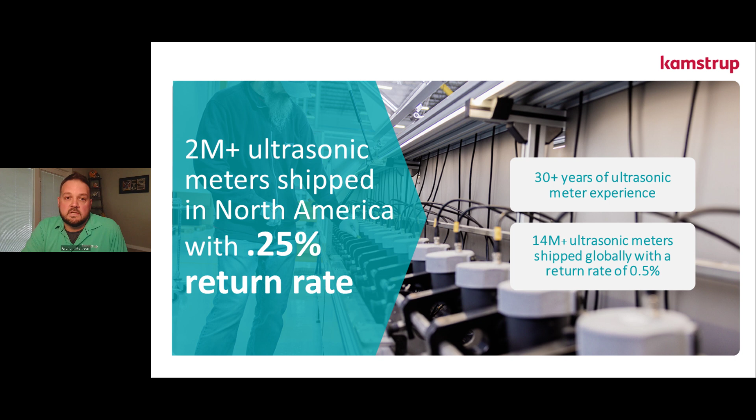The reason we use return rate is because we're counting everything that leaves the factory. If it comes back for any reason other than physical damage or ordering the wrong component, within the 20-year warranty period, it gets counted here. And even at that, we're still at less than 0.25% return rate across the entire spectrum of our product lines.

As I mentioned, all the meters we use here in the US, all the meters we manufacture, are ultrasonic. Let me give you a brief background on how ultrasonic technology works. Essentially, the meters have a couple of sensors in them, 2 ultrasonic sensors. Ultrasonic just means it's sound in a range outside the normal range of human hearing, a frequency higher than you can hear, but it's still sound. We essentially have 2 acoustic sensors passing a signal back and forth. When flow is going through the meter, any signal going with the direction of flow speeds up a little bit, and the signal going against the direction of flow slows down a little bit. We're just measuring that difference in transit time.

So essentially, it's that same equation everyone loved in high school, where one train leaves the station heading one direction, another train leaves heading the other direction. When do they arrive on time? If they don't arrive at their expected times, we're just measuring what time they got there and how much that shift is. That's how we can measure the flow.

The nice thing about that is we don't have to wait for anything internal inside the meter. There are no moving parts. It's a static meter, it's just math. All we're doing is measuring the speed of sound through water, and if it's different than it should be, it's because there's movement. If there's no difference in the speed of sound between the two sensors, it means there is no flow. What that allows us to achieve is, unlike a mechanical meter where starting flow rates are between 1/8 of a gallon and 1/4 of a gallon, with these new ultrasonic meters, we're able to get down to 1/100th of a gallon per minute as far as our flow rates and starting flows.

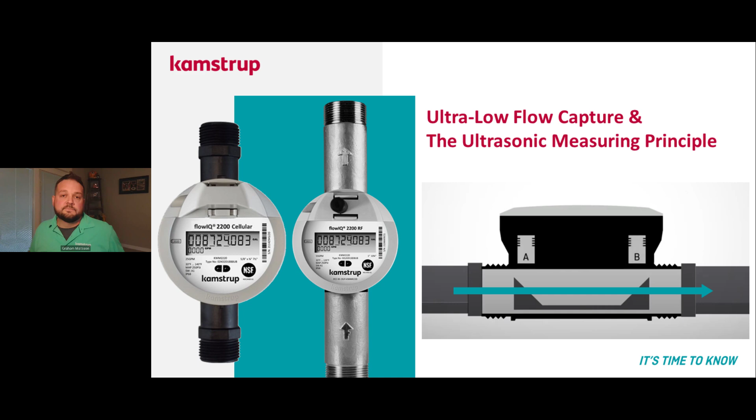When it comes to water loss, first thing we need to talk about is why it matters to your specific utility. So there's a lot of different drivers for water loss. It may be revenue, the big one, that's pretty universal across utilities. Some states have more regulations than others. There may be water scarcity issues in your area, you might be affected by drought. You may just be looking to have a more efficient system, reduce your environmental impacts, and increase customer service.

Big thing here, when we look at all of these, we went out and did a survey of 30 utilities across the US. We asked them what their drivers were, what the different things were that were actually driving their non-revenue water, and what they are looking for in a system to address those challenges and help their customers.

When it came to customer satisfaction, we were surprised at some of the responses we got, because when we talked to the customer service folks or the personnel in the field doing repairs and interacting with customers daily, the biggest question they were getting from customers was, what is the utility doing to conserve water on their side? We've seen rebate programs and other things to help improve customer efficiency and usage beyond the meter, but they want to know what the utility is doing to actually reduce water loss on the utility side. And now we have an answer for that. We'll go through it here in just a little bit.

When we talk about water loss, we need to break down what we're actually referring to. So when we talk about non-revenue water, that's a combination of apparent losses, which would be inaccurate metering or unauthorized consumption, theft, essentially older mechanical meters that lose accuracy over time. That's the water loss we're talking about. It's not actually lost, it has gone through a meter, it's just that the meter did not register, did not capture all of the flow going through it.

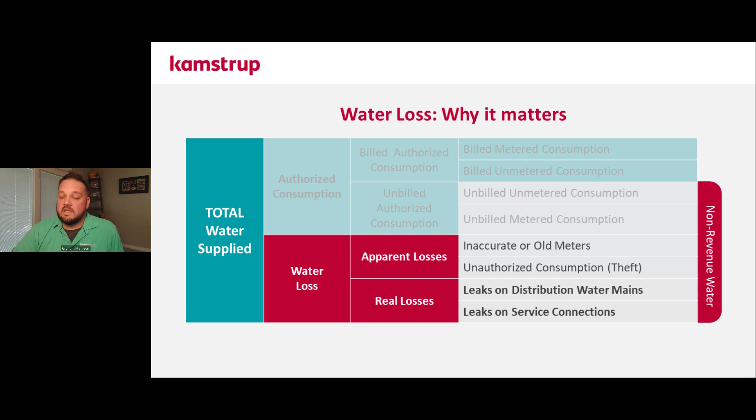When we talk about real losses, what we're talking about is leaks on the distribution main or on the service lines before the meter. So losses where the water is escaping the network before it actually goes past the meter. With this solution we're going to be discussing today, it's the first time you have a single piece of equipment that allows your utility to address both your apparent losses and real losses at the exact same time.

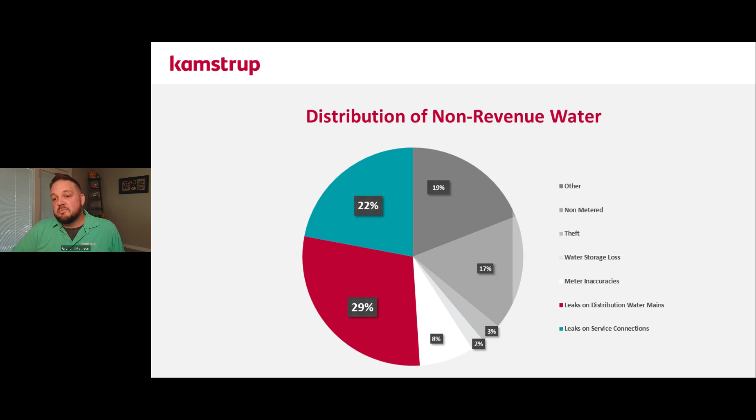When we talk about non-revenue water, there are multiple sources. You may have overflowed storage tanks or theft, some areas that are non-metered, things like hydrant flushing programs, and if you don't meter those, they would all fall into your non-revenue water bucket. The biggest thing we're going to be focusing on here today is water loss through your distribution leaks and leaks on service connections before the meter. Typically, when we look at non-revenue water, about 51% of water loss tends to come from leaks, and a little more than 50% of that tends to come from leaks on your mains as opposed to your service connections.

So if 51% of water loss is attributed to leaks, how do we find the leaks?

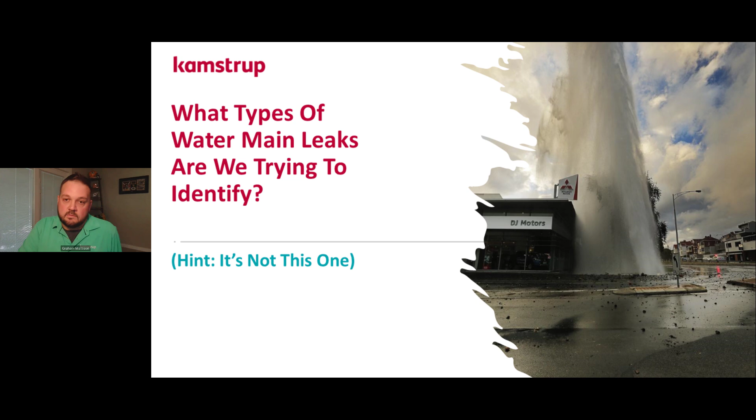Before we can actually go out and find the leaks, we need to know what types of leaks we're actually looking for. When we talk about leaks, hopefully we're not talking about this one - geyser destroying a car dealership. The whole goal with leak detection is to identify those leaks before they become a catastrophic failure, bursting through the ground, causing standing water, sinkholes, things like that. That's what the general public pictures when they think about leaks in water utilities - that geyser, that sinkhole.

Our whole goal with leak detection is to catch it before it ever gets to that point and reduce your water loss by being proactive about monitoring. When it comes to background leakage, those are the types of leaks where we're talking about a seep or a weep - a drip every few minutes or so. It's not generating enough energy to actually produce a noise, so no one can find those because they're not producing a signature that allows you to locate them. What we're looking for is leakage that does not surface, but is generating enough energy that's producing an audible noise that can be heard or detected remotely.

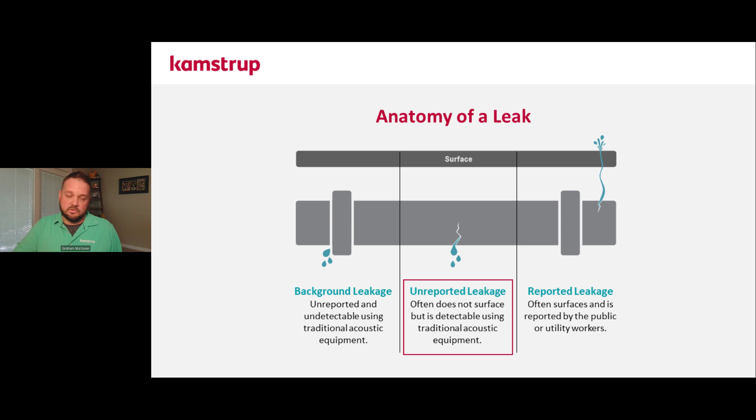When it comes to the different types of leaks that you actually go out and repair, most people picture that large geyser, that sinkhole, the big large main rupture, and yes, those lose a ton of water. In this case, it's a circumferential break - essentially the pipe snapping off and just pouring water out the end of it on an 8-inch main.

It ran for 3 hours because it reported itself. It was spotted immediately, you get out there, it gets repaired. Yes, you lose a lot of water for 3 hours, but it's repaired fairly quickly and shut down fairly quickly.

When it comes to a reported utility side leak, if it's a service leak, a lot of times we'll send someone out to look at it. If it's serious and it's on the utility side, it gets repaired fairly quickly. If there are other higher priority leaks to be dealing with at that time, and it is not a bad leak when they investigate it, a lot of times those will run for a little bit. The longer we let the small leaks run, the more they lose, and they lose it continuously. And you have a number of small leaks and they add up.

This particular example is a 4.5 gallon a minute leak running for 16 days - that's 104,000 gallons, which is 3 times as much as an 8-inch full main break running for 3 hours.

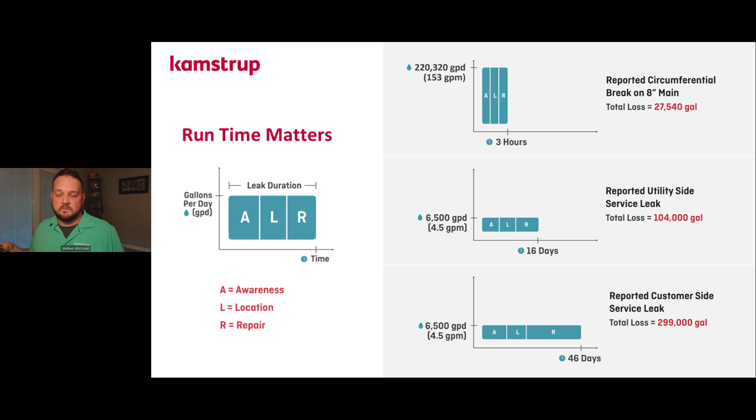Now, when you talk about customer side leaks, it's kind of at the mercy of whenever the customer gets around to actually repairing it, so it tends to run a lot longer. Assuming they're paying their bill and you're not in a drought condition, it's probably not that big of an issue for the utility, but we do want to be proactive and make sure that we're notifying customers and being as proactive with conserving water as we could possibly be.

When it comes to leak detection and actually finding the leaks that are generating our water loss numbers, regardless of what technology or methodology you use, survey method, the process is going to follow this general outline. You're going to do a system assessment - essentially you're going to try and figure out where in my distribution network is most likely to have leaks.

Then you're going to localize it - you just try to narrow down where in that area am I going to start my investigation. You send someone to investigate, they're going to confirm and pinpoint if they hear something. Once you've pinpointed and confirmed it, you're going to go out, have a crew repair, and then report on it - essentially take down all the information about that leak so you can do your year-end water loss totals and reporting. And then the cycle repeats itself.

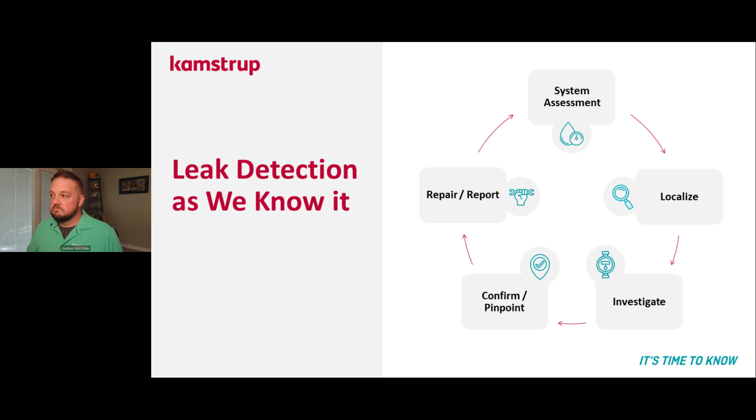So it doesn't matter if you're doing a manual survey, if you're hiring people to come in, if you're putting loggers out, or if you're using meters with built-in acoustic leak detection - this is the general process, regardless of the technology or methodology that's used.

When it comes to acoustic leak detection, many of you have probably seen some of these things at your utilities, even if you're not familiar with them as far as how they work or using them. The most common leak detection equipment that we find at utilities is just your common ground mic or listening stick - might be called geophones where you're at. Essentially it's just a headphone with an amplifier and a probe for listening to the ground.

Sometimes it might be an elephant's foot, which is just a microphone with a cover around it, so we don't hear a lot of noise from around us. Either way, that's the most common thing. It's just listening directly below you, and that's what gets used for pinpointing leaks out in the field after they've been identified.

When it comes to the next advancement away from that, it was lift and shift noise loggers. These would be your drive-by loggers, essentially something you set out on valves or any other type of connection that you can get to the main or the services, and just have them listen overnight. You come back, you download the data. If there's a leak, you repair it. Great. Then you move on and you start sweeping through another area of your system. You're essentially moving these devices systematically throughout your system in order to get through all of it and identify all the leaks in each zone.

Then you have things like your in-pipe surveys, your smart balls. These would be for your larger diameter mains, things larger than 16 inches, or large diameter PVC, HDPE. These smart balls work fairly well for those in-pipe surveys. One caveat there is you do have to make sure that you are in place to catch it at the other end, or they do like to get lost in the network if you miss them with the net.

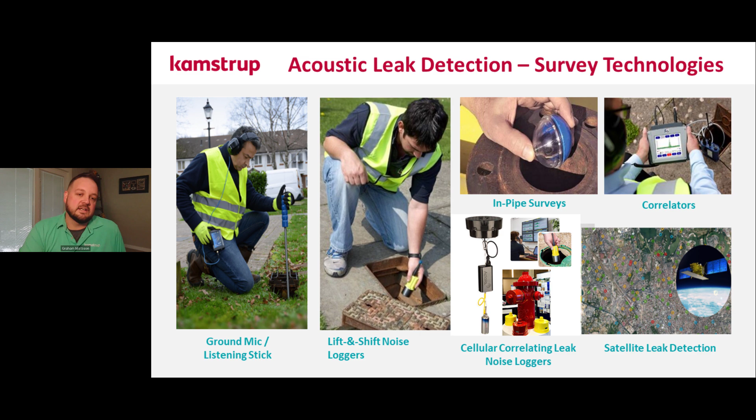All of those technologies are what we would typically refer to as a one-time leak survey tool. It allows you to go out, find your leaks, repair them, and move on. It allows you to sweep the system. It allows you to identify where your leaks are at currently. Some of them allow you to sit there for 2, 3, up to 5 years at a time and listen for leaks.

When it comes to things like your satellite leak detection, again, top down, one-time snapshot. Same thing when it goes for a leak noise correlator. You're out there, you're identifying the leak, you pinpoint it, and then you move on to another one. It's a one-time snapshot. What you don't end up with is visibility on what's going on after that leak has been repaired, and you don't have the ability to see what's going on around that device separate from the leak detection equipment itself. One other thing that we did want to bring up, just because we've been getting lots of questions about it in the past few months, is in-meter pressure monitoring, specifically for leak detection.

It does work for leak detection, but it's really good at identifying those catastrophic leaks, like that geyser that was destroying the car dealership earlier. It's good at identifying leaks where the system can't physically recover the pressure behind the leak—basically a leak so bad that pressure drops and we can't get back to where it should be. We don't typically need to locate those. They tend to be your geysers, your sinkholes, your standing pools of water, or the stream running down a sidewalk. Those are fairly easy to identify.

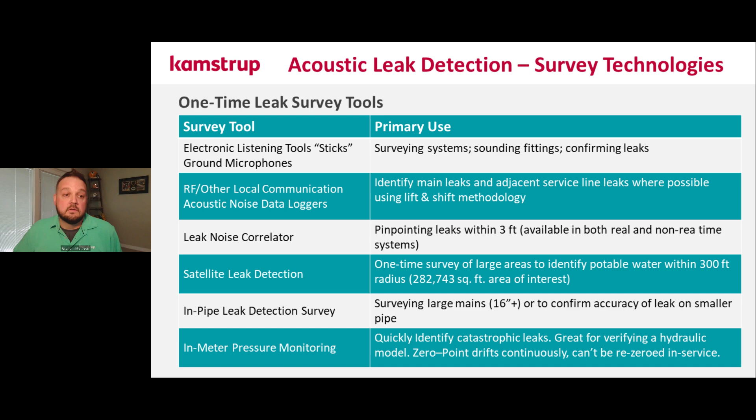We've covered the other technologies you can use for leak detection, how you use it, and where you would use it. So what is built-in leak detection? What is built-in acoustic leak detection when we're talking about having it built into a meter?

When it comes to ultrasonic meters, what we're attempting to do is pass a signal back and forth between two different sensors, and then measure the shift in that signal, either faster or slower, based on whether or not there's flow going through it and which direction. In order to measure that flow, we have to account for all the acoustic interference going on around that meter. Essentially, we're listening all the time to see if there's any noise around that meter and adjusting our signal path to account for it.

One of our engineers thought, well, if we're listening for all the noise going on around our meter anyway, why don't we put a little module in here that tells the meter to be quiet for a bit, just listen to what's going on around you, and then pass that value on. In the past we've just been throwing it away, using it only for our calculations—wasn't useful to anyone. We realized, hey, we can listen for leaks with this.

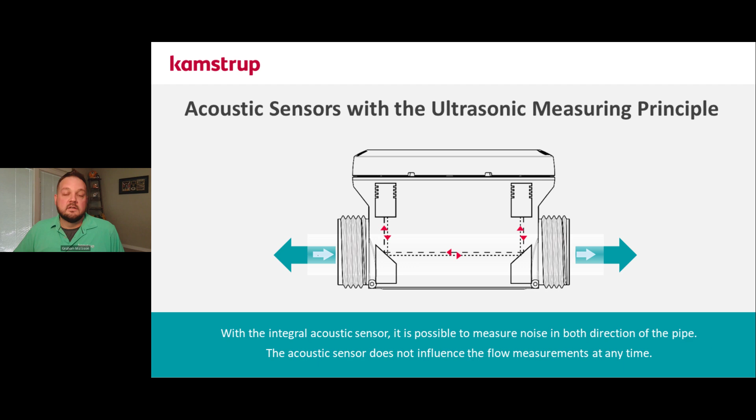So now that's what we're doing. We're essentially taking the noise value of exactly what's going on around the meter and passing that information along, allowing you to see what's going on acoustically around the meter. The beauty of it is it's the same sensor we're using to measure flow—the exact same process. We don't have to do anything different, which means there's zero effect on battery life. That means we can have a 20-year leak detection solution now and not have to worry about the batteries dying 3 to 5 years down the line. It's 20 years now.

So what types of leaks can actually be identified with a meter that has built-in acoustic leak detection? We're no longer just talking about constant consumption or customer-side leak detection—everyone's been able to do that for 25 years. That's what we've been calling leak detection in the metering industry for more than two decades. We can do that, but what we're really focusing on is what's going on before that meter—all the stuff that's not going through the meter, not being captured, not being recorded or billed. What's going on before the meter, and how do we identify where we should be sending our crews to go out and pinpoint, find, and repair these things.

Typically, if a leak is between the meter and the main on the service connection, it's going to light up one meter, or maybe the adjacent meter that's really close by. The main reason is that service connections don't weigh very much, so they don't transfer a ton of energy to the water main. This means if you have a leak on the actual main itself, instead of one meter or the adjacent meter lighting up, the water main weighs a ton more than the smaller service line connections attached to it. It's going to vibrate and shake everything attached to it. So a leak on the water main tends to vibrate everything around it, and all the meters around it light up. Then we're just looking in between the two loudest meters.

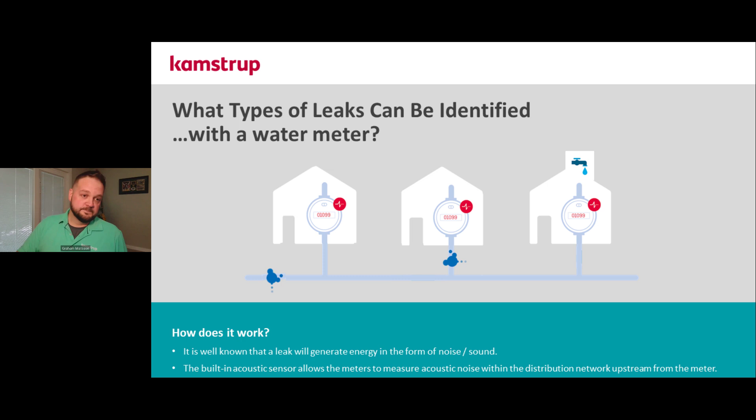When it comes to built-in leak detection, why is that a big deal? Why do we want to have it built in? Is that better than having a standalone leak detection device that only does leak detection? Well, it can be. One of the things we always get asked about leak detection is how far can your sensors hear the leak? How far apart can I put these sensors and still hear the leak? It's a good question, because it's the question we've always had to ask when it came to leak detection—how far apart can we space these things and still hear the leak?

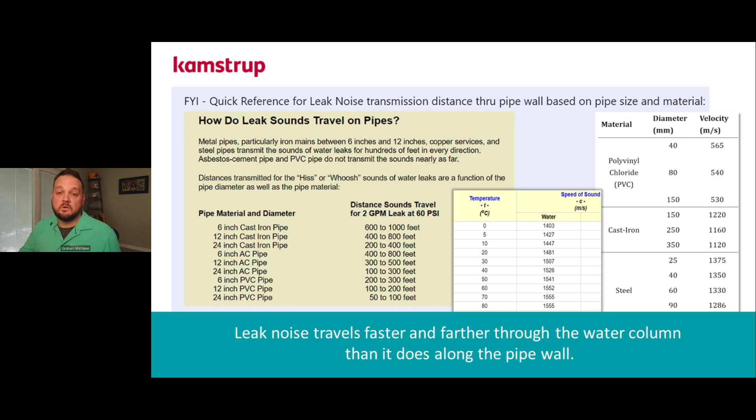Sensors that were sitting on top of a valve via magnet were using weight and the force of the magnet to help the sound couple and transfer to that data logger. We don't have the issue of: is it on? Is it connected? Is it coupled all the way? Is it perfectly centered? Because literally the meter is the pipe, the pipe is the meter, and the meter is the noise sensor—it's all in one. Because noise travels further and faster through the water column, and because we're spaced so much closer together, there's literally almost nowhere for the leaks to hide. We'll go through and explain how that works and why.

One of the other things when it comes to leak detection: all of the technology we're talking about today is built into the meter, under the glass. That means there are no extra wires, no standalone sensor, nothing separate from the meter—literally the radio or modem module, the noise, the acoustic leak detection, everything is built into the meter under the glass. What that does for you as a utility is you no longer have three different warranties to worry about, there isn't multiple batteries anymore, and the sensor isn't acting independently from the meter. The meter isn't notifying you independently from the sensor. What I mean is you're no longer going to get alarms from a sensor sitting right next to a meter that has constant consumption and usage, because that meter knows what's going on.

And now the sensor itself knows what's going on in the meter. Having it built in there gives you the ability to see in 2 directions - is this a leak, and which direction is it at? If the meter's spinning, we know it's on the customer side because it's not going to zero. And if it's not spinning, we know that this noise is being generated from in front of the meter, not due to consumption down the line.

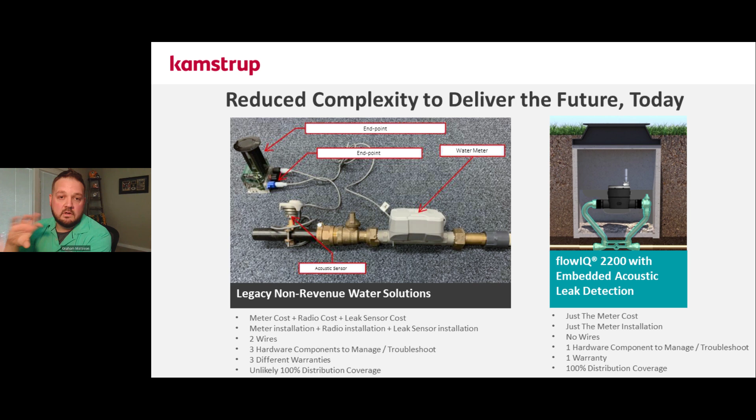It just makes it a lot easier for us to actually manage this and not have to maintain the hardware constantly, not replace batteries all the time, not worry about wires getting chewed up or cut, not worry about the endpoint radios actually being ripped out of the ground or hit by lawnmowers, things like that. It's one single unit under the glass, no extra wires, no extra sensors, no extra hardware.

And I say all that because everything that we've been doing up until this point when it comes to leak detection is what's referred to as a minimum viable survey deployment. Literally, we were asking the question, how few of these sensors can we possibly put out in hopes of catching at least some of the leaks? We don't have that issue anymore.

You're literally getting 10 times as many sensors. And because it is the meter and it's the same sensor element we were using before, there's zero hardware cost now. So not only are you getting 10 times as many sensors per mile, there's no cost for those sensors other than the meter itself. If you already have meters in your system, or you're putting meters in, there's no additional hardware cost for a leak detection sensor. There's no additional infrastructure.

Biggest thing here, though, is instead of spacing of 500, 1,000, or 1,500 feet, now we're spaced in town 50 to 100 feet apart. In the past, a lot of what we were doing was innovating in order to overcome the fact that the sensors are spaced 500, 1,000, 1,500 feet apart. And the reason they were spaced so far apart is because they're expensive, unfortunately.

So the nice thing here is, like I said, zero hardware costs. You get 10 times as many service connections per mile. And it's very easy to manage because you're literally so granular as far as how tightly you can get down and narrow down your focus, do your investigation, do your pinpointing. We're literally sending crews out to do pinpointing, not surveying anymore.

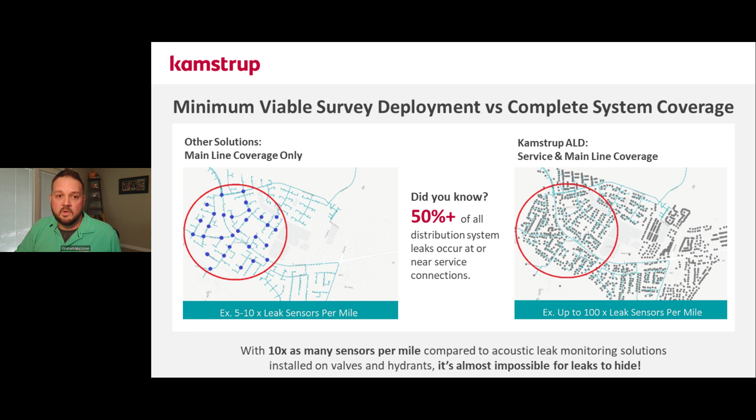When it comes to leak detection software, regardless of what technology you use, it's going to give you 3 basic things. It's going to give you a map with your sensor locations. It's going to give you an audio graph so you can see what the noise was like at that location before, during, and after you repair the leak. So we should see it go back down and stay down. If it does not go all the way back down, we know there's another leak there instead of just one. And if it goes down and comes back up, then we know that a new leak is popping off, and that's a situation we need to manage.

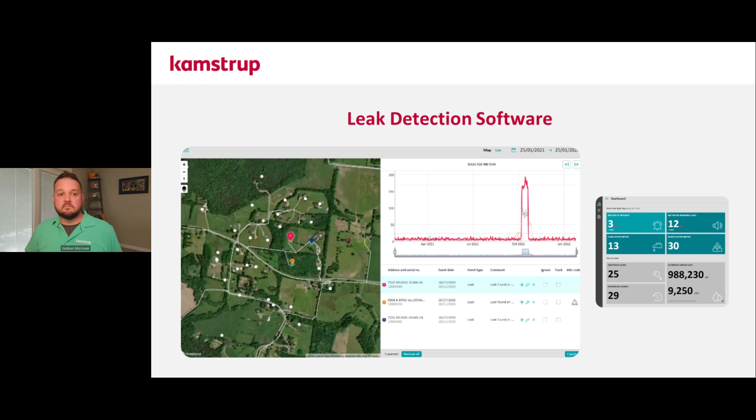One of the biggest questions that we get at that point is, typically, well, I'm getting 10,000 times as much data as I ever got before. I have sensors everywhere. We never had sensors before. Maybe we were hiring someone to come in and sweep our system, maybe a third of our system every year, half of our system every year. I know I've dealt with utilities in the past where they're doing 20%. So essentially they get through their system once every 5 years.

How do you manage all that? Well, one of the ways that we do it is it's kind of hard to see, but behind the little white arrow with the pulse sign there, there's a red slider. What that allows us to do is actually sort and categorize our dot colors, basically our sensor locations on the map, based on how loud it is.

What this allows you to do is if you're taking full-time meter readers and you're going to be repurposing them or retraining them to become expert pinpointers or expert leak detection personnel, we want to be able to train them on your system so they can learn what leaks sound like in your system, because everyone's system is going to sound a little bit different. You have a different mix of pipes, different types of soil, different pressures. It's going to be a little bit different everywhere you go.

The nice thing is we allow you to sort it based on how loud the leak is, which means that when your crews go out there and they start working with the system, they're getting trained on the easiest to find leaks first, and it's going to get progressively quieter and progressively harder.

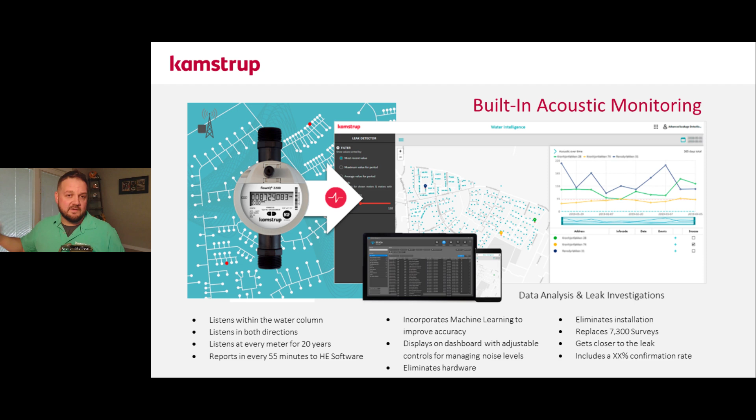Before we get into a case study where we see what a customer that's used this is actually getting out of it, and how it works out in the real world, as opposed to just me talking about it, I want to go back through some of the main features to reiterate.

With acoustic leak detection built into the meter, you're getting acoustic leak detection across your entire network. That's 7,300 distribution-wide acoustic leak surveys over 20 years. There's no additional hardware, no additional infrastructure to collect the information.

Most importantly, there's no additional manpower required to set up, maintain, and utilize the system. It's out there, it's in the meters, and as long as your meter reading comes in every day like it should, you're getting your leak detection every single day on time, just like you should.

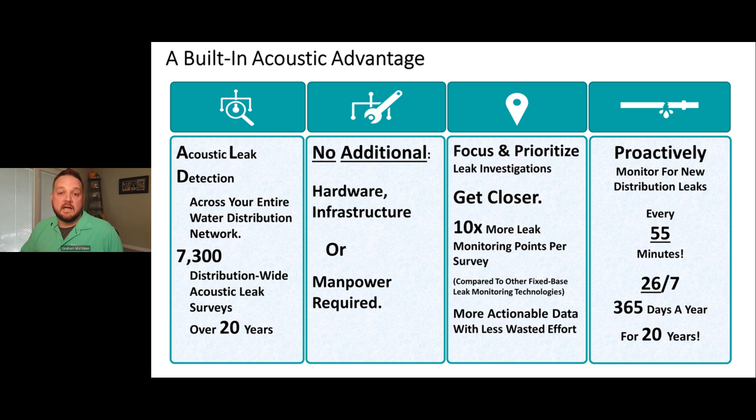That gives you the ability to get closer and actually focus and prioritize your leak detection efforts and your NRW reduction efforts. What I mean is you're getting 10 times as many sensors per mile surveying constantly, every day, and we do it proactively.

We're listening every 55 minutes, 26 times a day, 365 days a year for 20 years, and we listen every 55 minutes because what we're trying to do is eliminate our false positive noise sources.

Intermittent noise like pumps running or people irrigating. Traditional leak detection equipment listens at around 2 a.m.

It does that for a couple of reasons. It's listening at 2 a.m. because hopefully most people are asleep, which means they'll have their tap shut off, and everything spraying for a leak should have a little bit more pressure behind it and spray just a little bit louder.

The other thing is they're hoping that because everyone's asleep, it's going to be a little bit quieter, so we're going to get less ambient noise in the area.

But the biggest reason that we're listening at 2 a.m., or why most traditional leak detection equipment listens at 2 a.m., is because we're trying to conserve battery. The sensor takes power to run, transferring that data takes power to transfer. It's additional, in addition to just being out there and listening for the leak. It has to do everything.

The nice thing with this, we're listening every 55 minutes, 26 times a day. We're taking the lowest value because we're not using any additional battery to do this. This is the same value we'd typically be using to do our normal flow calculations.

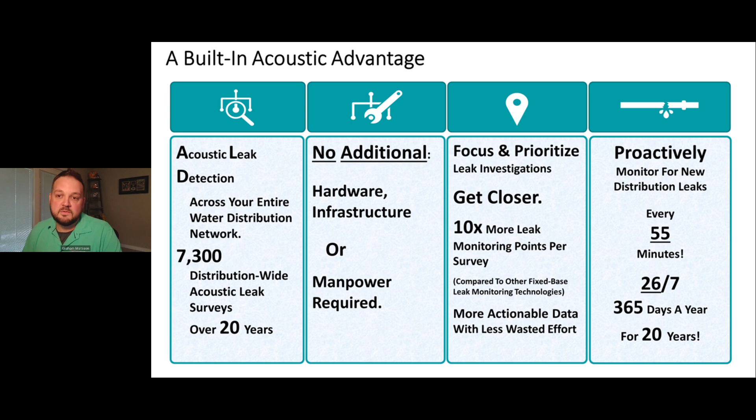If you see additional noise and it doesn't go away, it's most likely a leak, because if it wasn't there before and it is there now and it's not going away, that's what leaks do. If it got loud and then stops being loud, it's not a leak. Leaks don't typically repair themselves, so the noise typically only gets louder, not quieter.

So what are customers actually utilizing this getting out of it? What do they get out of the system? How does it work? Let's see it in the real world.

First case study here is the town of Oneida, Tennessee. They were one of our first users that deployed a full AMI system with all meters with built-in acoustic leak detection. They started out with 4,620 mechanical meters in their system that needed to be replaced.

They were looking at doing a 6-month deployment. That required them to install 15 data collectors in order to monitor their 118 square mile service territory and 322 miles of mainline pipe.

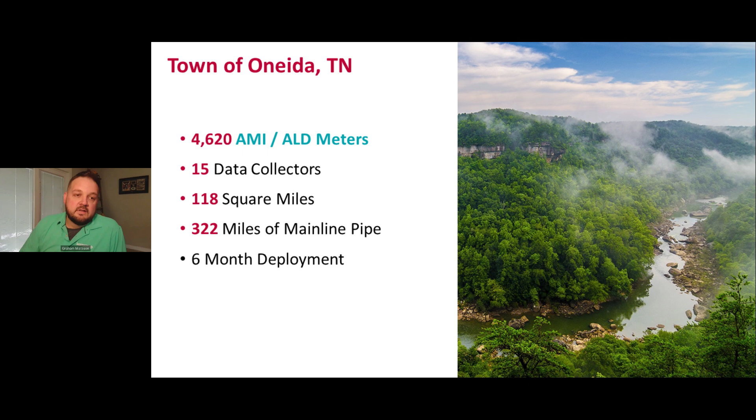A 6-month change out is fairly aggressive considering the size of the utility, but they did it. They changed out all 4,620 mechanical meters in 6 months.

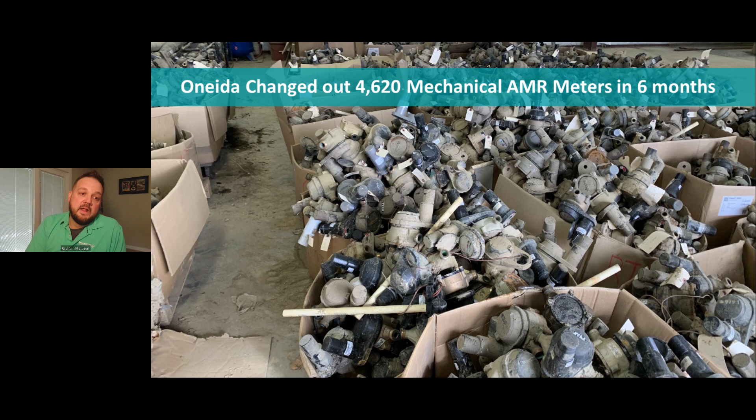The reason they were so aggressive about it, trying to accelerate it in 6 months, is because at the time they were at 51% water loss. In the first 3 months after getting the meters deployed, that went from 51% down to 28% non-revenue water. So 10.7% of that was just from the initial meter change out, the savings and gains you get from going from old mechanical meters to brand new ultrasonic static meters that never lose accuracy. The difference there was 10.7%.

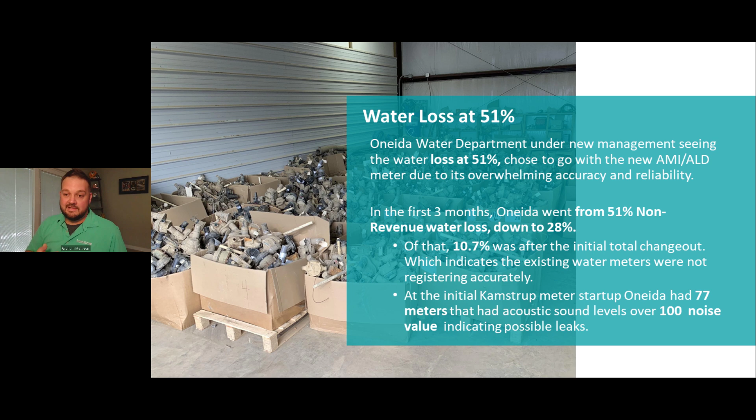Everything else was from the acoustic leak detection. When they turned on the system at initial startup, Oneida had 77 meters that had acoustic noise level over 100. Essentially, it's loud enough to indicate that there's a potential leak there.

So what did Oneida do? They took their two full-time meter readers and had them retrained to become expert pinpointers. Not necessarily surveyors. What we want is people who can get to the site, identify where the leak is, pinpoint it, and put an X on the ground so we can repair it. We no longer are just kind of wandering, trying to find the leaks. The system's going to tell us where they're at. We just need to be able to identify and locate them once we get there.

So they took their two full-time meter readers, had them retrained as expert pinpointers, and got the equipment to do the leak detection themselves—things like ground mics and correlators, to pinpoint on site after the leaks are identified. That first year, they repaired 70 plus leaks.

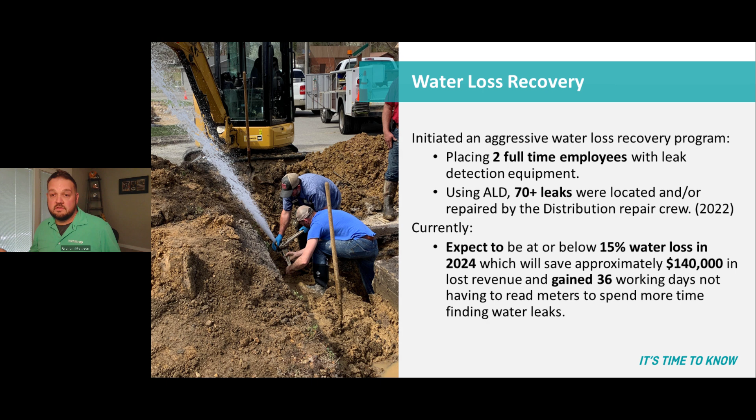Two years later, they're expected to be at or below 15% water loss. That should save them an additional $140,000 in lost revenue and gain an additional 36 working days, which is a fairly big deal. The even cooler thing is not only were they able to reduce their water loss from 51% down to 28%, but they were able to keep it low and then drive it lower.

A good example: their water treatment plant had typically been running 15 to 14 hours a day. Since deploying the system and repairing those leaks, that's gone down from 15 to 14 hours down to 11 hours per day—a 3-hour-a-day reduction in treatment plant runtime. That doesn't sound like a ton, but that's 45 operating days a year. It's a month and a half less operating time on their water treatment plant every single year going forward for the next 20 years.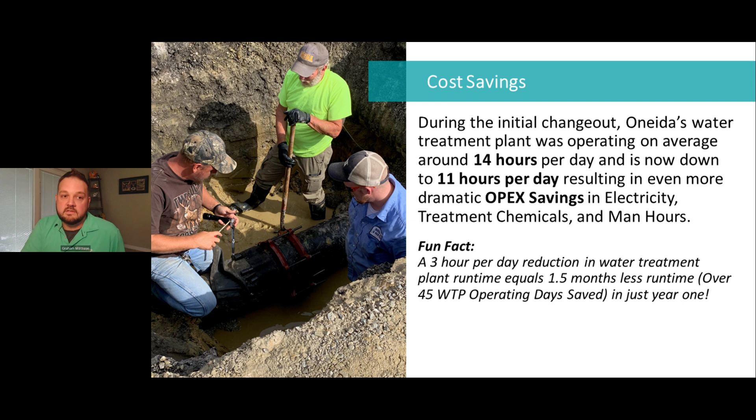So what types of leaks were they able to find with it? Well, again, they had 77 leaks, and about half of the leaks you're able to find are going to be service leaks, because about half the leaks out there tend to be service leaks.

The thing is, this one ran for 4.5 months. It's not a big leak—it's 4 gallons per minute. But because they had so many other leaks to get to, by the time they got to this one, it's estimated a little over 750,000 gallons had leaked out of it in 135 days.

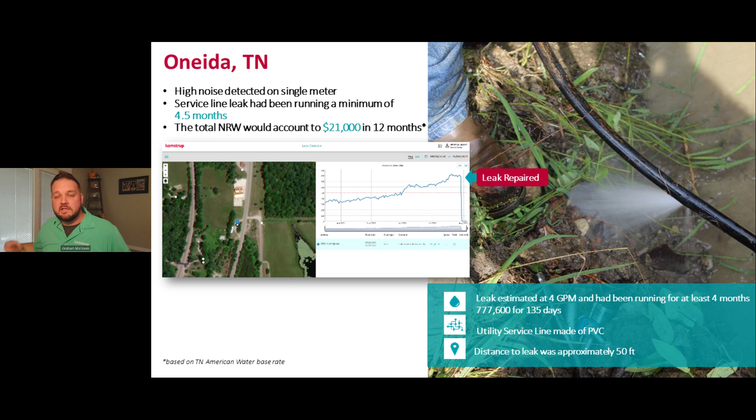It was non-surfacing—it was in a ditch line. Just rocks rubbing against the PVC service line caused a split. It was well-drained soil, and there's a creek on the other side of it. Would not have known about it without this. The big thing is they were able to repair it and see that the noise level has gone back down, and now they're able to monitor for any additional leaks in that system. We're able to tighten up the zone and keep it tight.

Here's a really good example of why most utilities feel like with leak detection, they've been chasing a dragon they're never going to catch. Why is it that when we go out, survey, fix our leaks, repair all the leaks, then come back and look at our outflows from our treatment plant or what we're pumping into the system 2 months later, it looks exactly the same—or may have gotten slightly worse? This is exactly why that happens.

Typically you go out there and identify the leak. In this scenario, a leak had started, plateaued, got worse, plateaued again. They were able to get out there and repair it. But 2 days after the repair, you see a little green line on the right here creeping up—essentially what's happened is they've made the repair on the main line leak.

It was a big leak, 180 gallon per minute leak on a 6-inch AC main. The furthest logger away was about 1,500 feet that heard that initial leak. They repaired it. Two days later, that same logger that was the furthest one away before is now hearing a new leak starting at that location.

The difference is we're able to see this leak at the beginning, in its infancy. What that means is you're able to schedule the repair. It's no longer an emergency situation. You're not having to send someone out at 3 a.m. on New Year's Eve, hoping they can identify this leak, dig it up, and repair it in a timely fashion while everyone's eyes are on you. You can do this in perfect weather conditions now. You can make sure you have all the materials, and you can do it on your time because we're finding it early and can monitor it in real time.

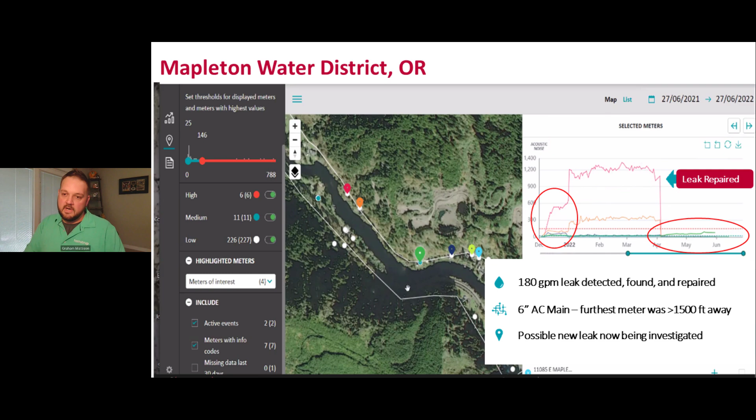Here's another example from Oregon. This is going to be my last example of the slideshow, but this is for the people that really want to know how far away you can hear the leak. This example is a 14-inch main, a 30 gallon per minute leak. We were able to hear it up to half a mile away on both ends.

Now, granted, this had galvanized service connections. Galvanized service connections tend to ring like a tuning fork, so if there's a leak, they transfer the sound from that main very well. But again, it's a 14-inch main, and we were able to have our meters on either side of it hearing it from up to a half mile away.

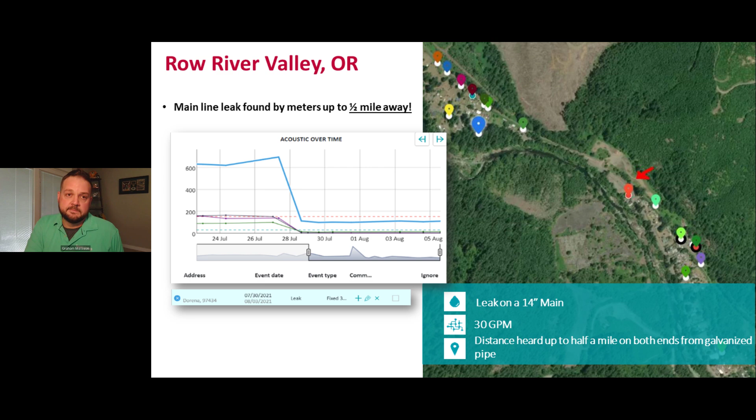Just to reiterate, 51% of water loss is attributed to leaks. We now have a good way of doing something about it, and it's not going to cost you an arm and a leg. You get 10 times as many sensors without any additional hardware, infrastructure, or manpower. And it's a 20-year solution now. We no longer have to worry about replacing batteries every 3 to 5 years. We put it out there with the meter. It is the meter, and it's going to last you 20 years.

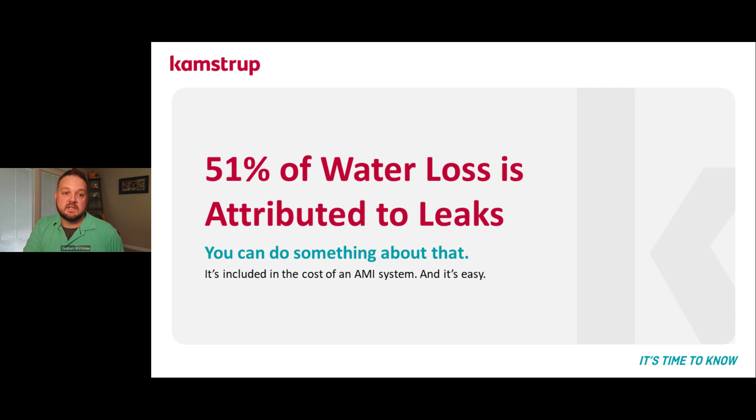So with that, let's open it up, see if we got any questions. Happy to answer them and go through it.